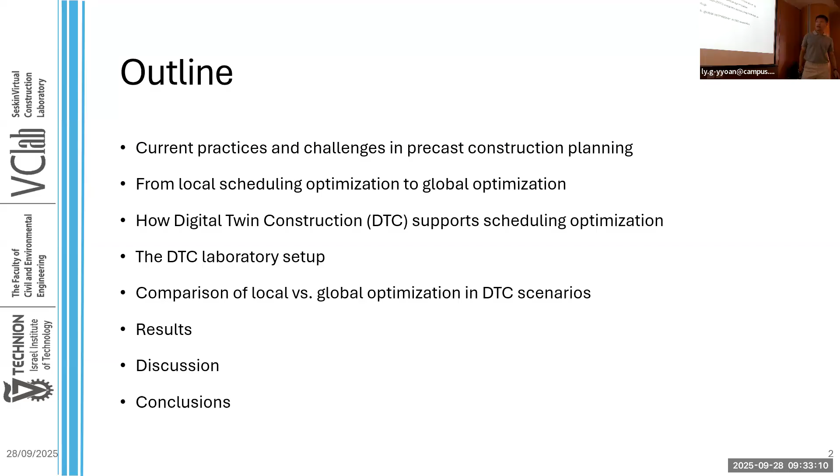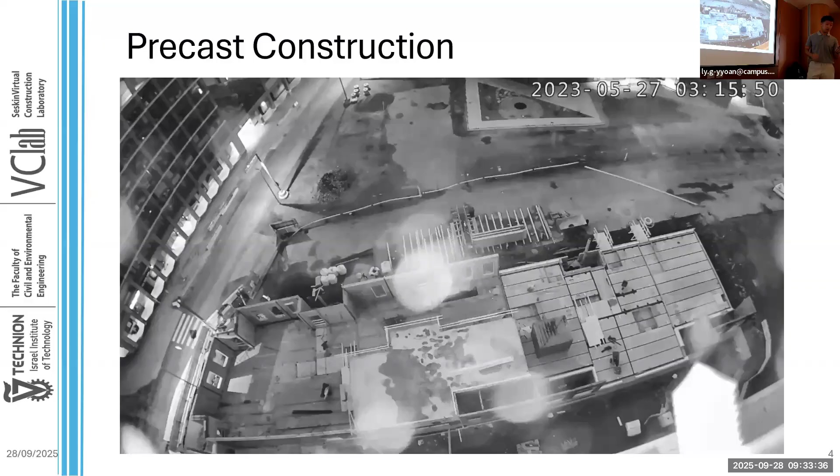Its global share is keep increasing, especially in North America and Europe, where the worker shortage is very crucial. But precast construction has its own problem: factory for production, on the road delivering, site erection - they are separated, and the planning are also isolated from each other.

This table is an interview summary with our project partner in the past. He shared with us that the precast design will freeze 6 weeks before delivery. Delivery slot negotiation will start 1 month ahead. Final slot confirmation usually 1 to 2 weeks before delivery. And the negotiation approach is mostly via phone call or email.

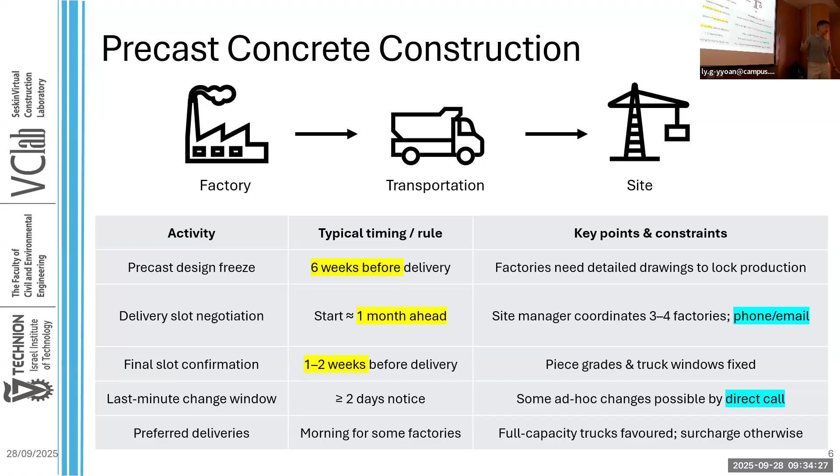So we can somehow conclude that in precast, there's lack of information sharing across stages, factory to site. Manual planning, and planning only focus on individual stages. At each operational space, factory doesn't like frequent mold changes, and site doesn't like delay. And they usually have conflicts.

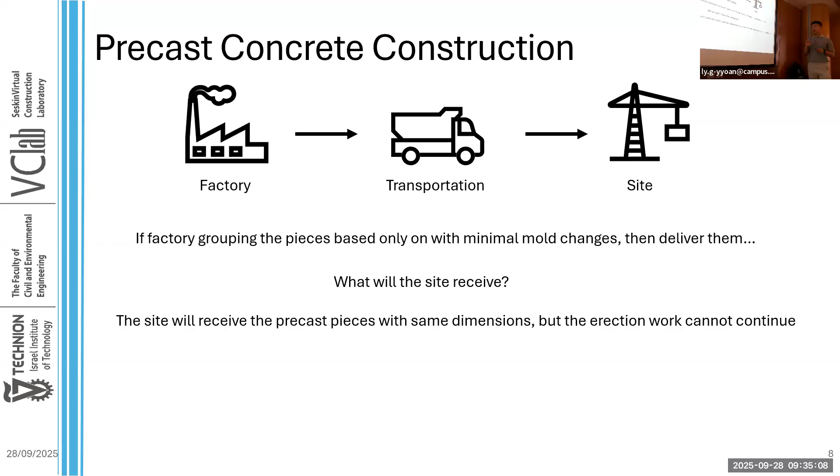For example, if factory groups the pieces only based on minimal mold changes, then delivers them to the site - what will the site receive? The site will receive the precast pieces with exactly the same dimensions, and erection work cannot be continued because no project can build the building this way.

So to address the issue, the current practice of factory planning uses this earliest due date rule. In the production line, they sequence the pieces - what is the first piece they're going to produce? The piece with the earliest due date.

In some very highly automated factories like Elematic, they have this manufacturing execution system, MES system. But this system is widely used in other industries like vehicle manufacturing and electronic manufacturing, but less adopted in construction. But companies like Elematic, yes, they have it.

The main purpose is to optimize the layout of casting beds, minimize strand waste - the strand is the pre-tensioning in the slab - and track the production progress consistent with design changes.

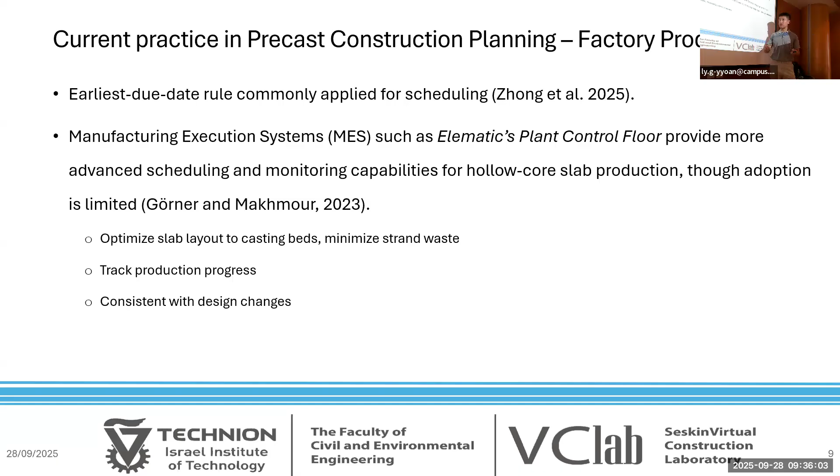In the literature, since Johnson's work in 1954, researchers have developed many topics in optimization of precast production. They formulate the problem in the topic of flow shop, resource allocation, mold grouping, and supply chain management, and they select mainly total make span or cost as their main target.

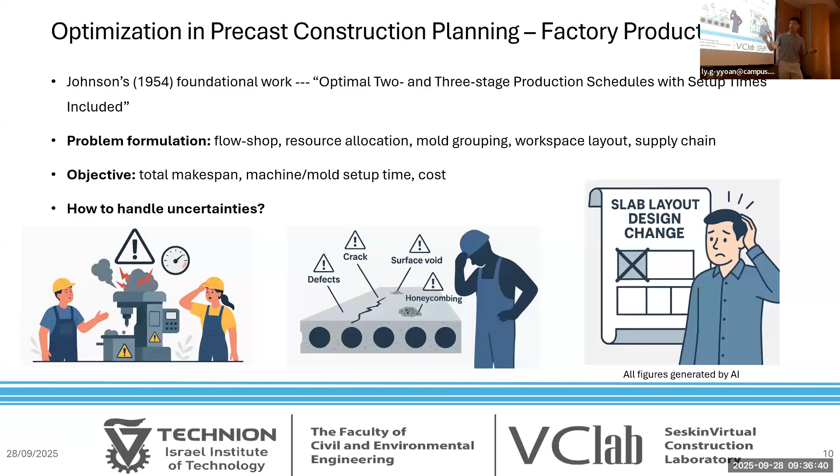But they fail to address how to deal with uncertainty. What if machine breakdown? What if defects? What if design change? What if due date change? So our study is about how we address this uncertainty issue. They develop a two-level rescheduling model for precast production, mainly against due date change. The structure is simple.

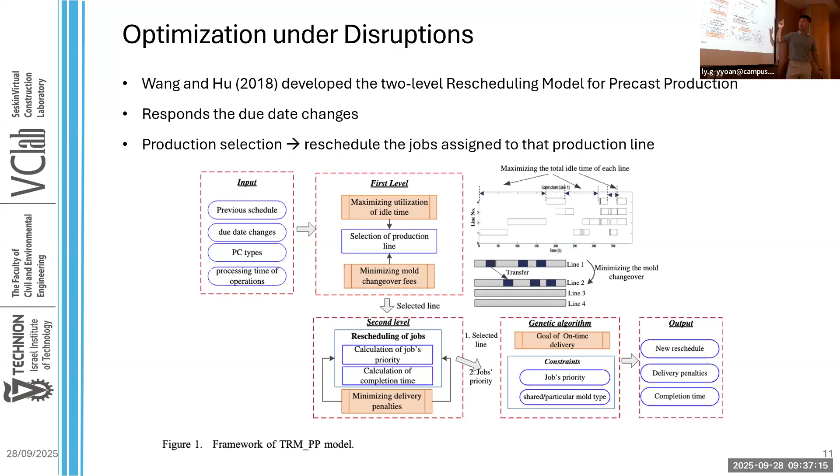First level, they will choose the proper production line to handle this external job. Second, regarding this selected production line, they reschedule all the pieces already assigned to the production line using GA by minimizing the delivery penalties.

Another study addresses the same issue, the due date change. Two steps: the first step is due date change and uncertainty generator. They evaluate this due date change uncertainty scenario by two parameters, due date change magnitude and due date receipt time. The magnitude means the due date changes 2 days early or 3 days after. The receipt time is what time the factory manager can notify this change.

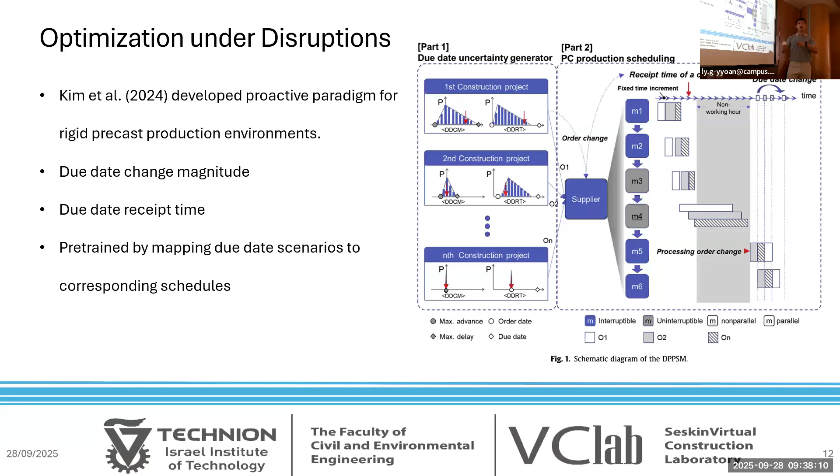Based on these two parameters, they generate many due date change cases and solve them one by one using GA. So essentially they pre-train all the scenarios, and if a real world due date change happens, they quickly match the closest one and apply it to the real world.

Now we move to the next stage: site planning, basically carried out into three main categories. First, traditional activity-based scheduling; second, lean method; and third, structure decomposition idea.

First, traditional method, activity-based scheduling, using Gantt chart, milestone, critical path method, based on fixed duration and dependencies. Lean methods like the last planner system only release ready, sound activities to the workers, and takt-time planning defines blocks of working time to enhance the delivery flow, the working flow of trades.

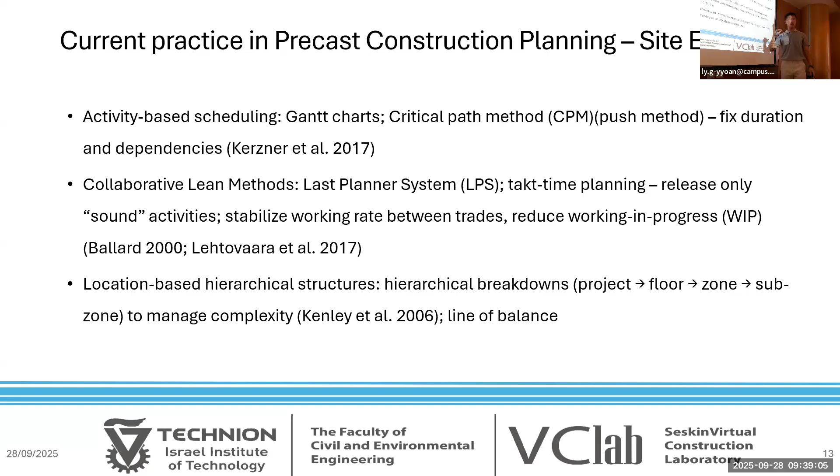Location-based hierarchical structures break down the whole building structure into floors, into zones, into subzones to manage the complexity. Another very interesting study for site erection.

This study developed a real-time synchronization system to handle disruption in precast assembly using digital twin. They have 3 layers: material arriving in the buffer, crane lifting the material, and workers doing assembly. They divide the time interval into small decision cycles, tau, typically 5 to 30 minutes.

At the end of each tau, they collect new information, update it to the digital twin, and check if all the material is ready, if the crane is ready, if all the people are prepared. If everything's satisfied, they continue and perform the work decided in the last decision cycle. If not, they make a new decision.

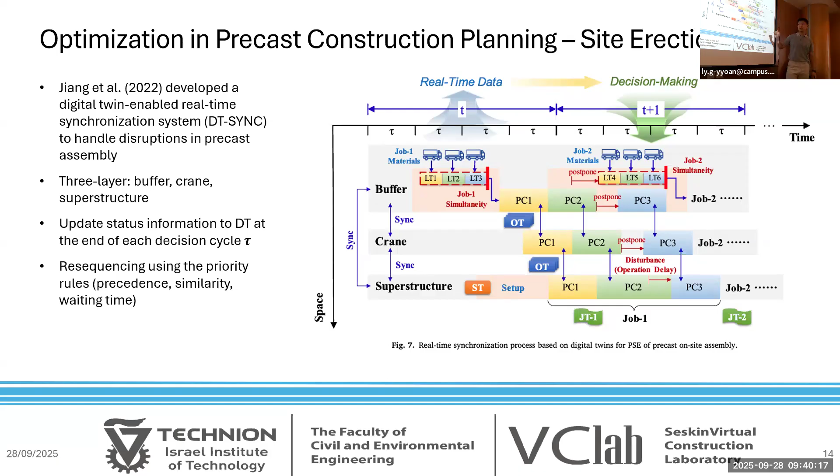This decision is based on simple priority rules: precedence of the job, similarity of the job, waiting time of the job. There's no real optimization algorithm behind this system because they need to make quick decisions.

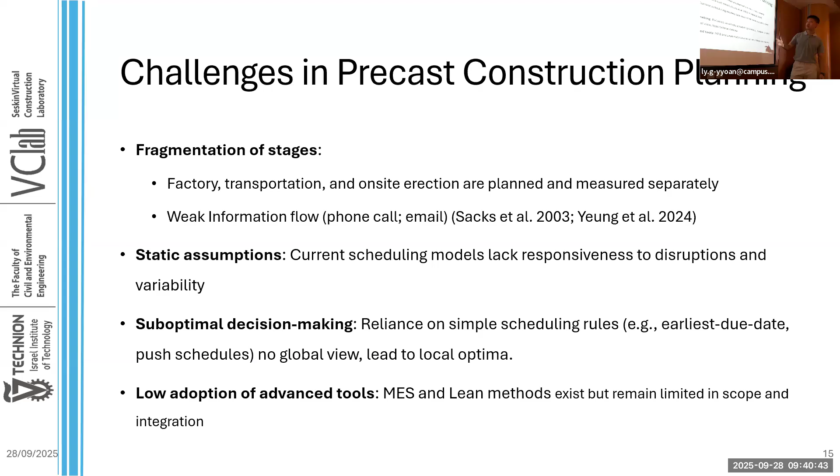To summarize the challenges in precast planning: fragmentation of stages, since the factory, transportation, and site erection are separated; weak information flow, since information does flow but through phone calls and emails, not a good flow; static assumptions and suboptimal decision-making; and less adoption of advanced tools.

So to address those issues, what do we need? We need to enhance information sharing with short-term feedback to improve the information flow, global optimization for global solution searching, and capability to handle uncertainty disruptions. And we need technology as a container to integrate everything.

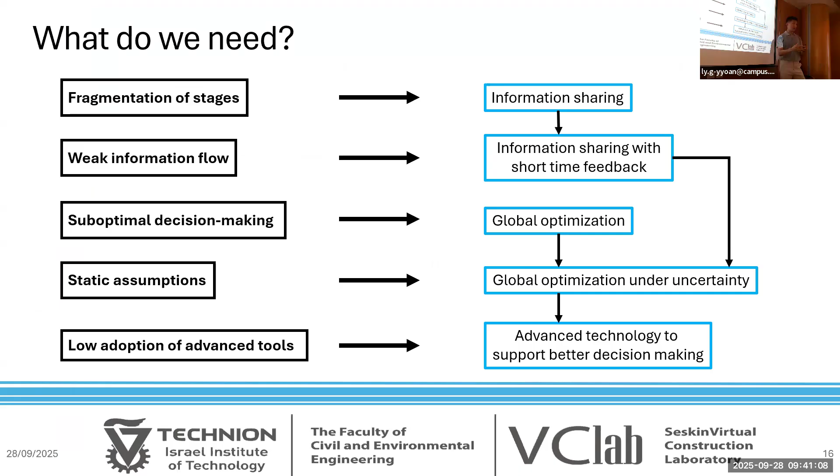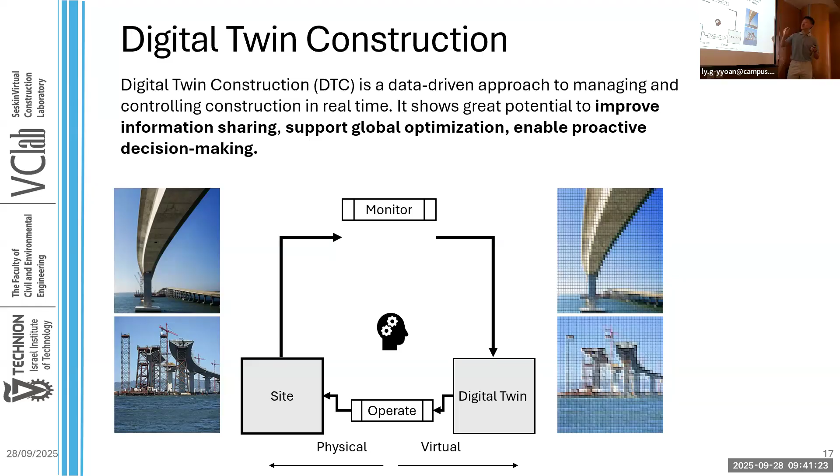So now I'm going to introduce digital twin construction, a data-driven approach to managing and controlling projects in real time. It shows great potential to manage situation awareness, support global optimization, and enable proactive decision-making.

The definition of digital twin has 3 levels. They don't all belong to the same category. A static model doesn't change, it's static, like a BIM model. A digital shadow is one-way dynamic; the virtual model will update when there's any physical changes.

And a digital twin is two-way dynamic, it's interactive. The virtual model will update when there are physical changes, and it can also analyze the surroundings and make new recommendation decisions for the real world.

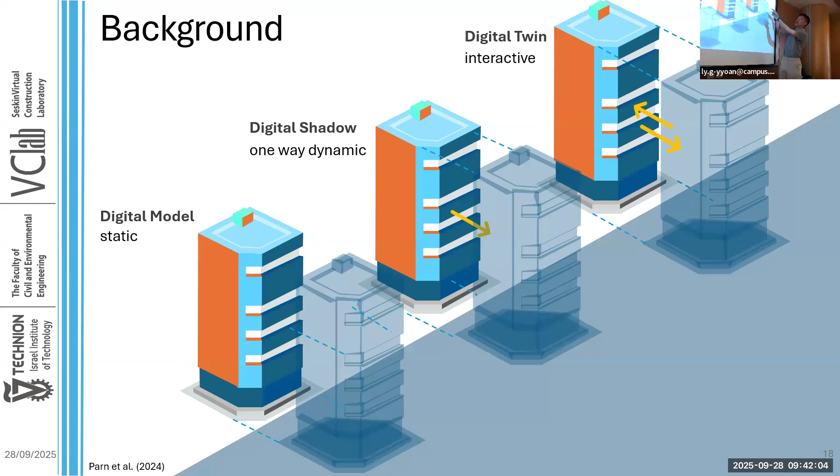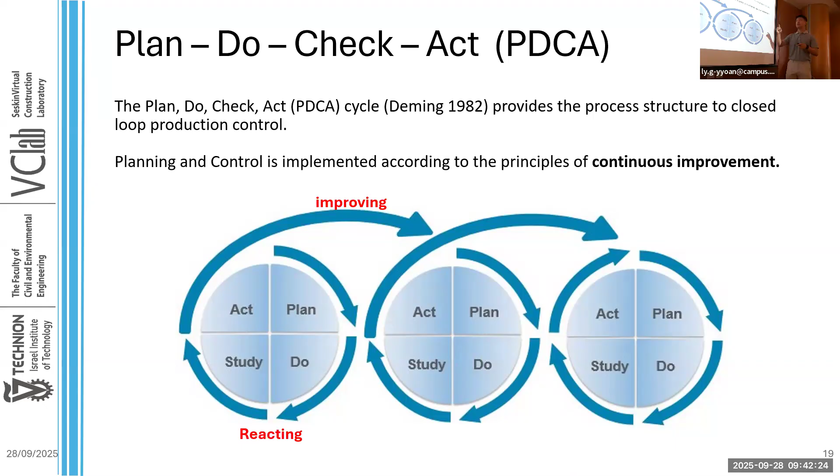So we combine digital twin with the PDCA cycle, and we arrive at DTC. I'll show this picture larger. So the key part of digital twin construction is this.

We interpret the data from the construction site, and we update the status model. What is a status model? The status model contains the current status of our building, of the worker, maybe of the whole construction site layout.

Then we compare it with our design model, what we want to achieve in the end, usually a BIM model. And then we make a new decision: we check the conformance, we predict the performance, and we make new decisions.

This decision acts as guidance to the site, forming a plan-check continuous improvement loop. On the left-hand side, we continuously store the project data together with historical data from other projects, and we may use machine learning algorithms to study the patterns and improve future performance.

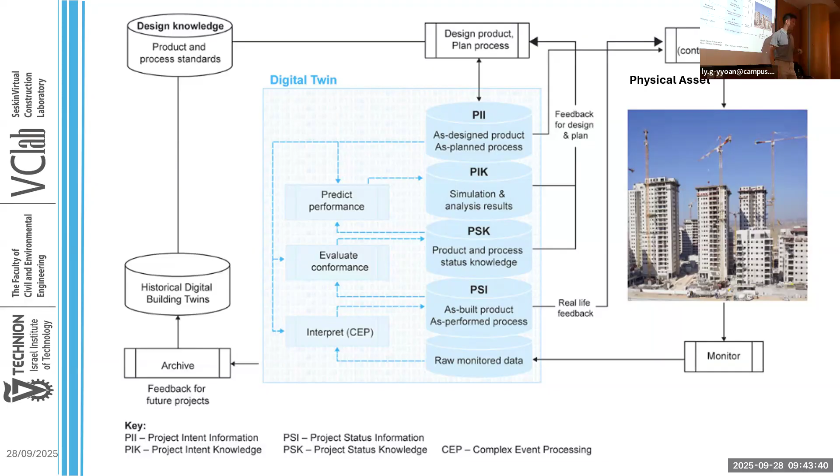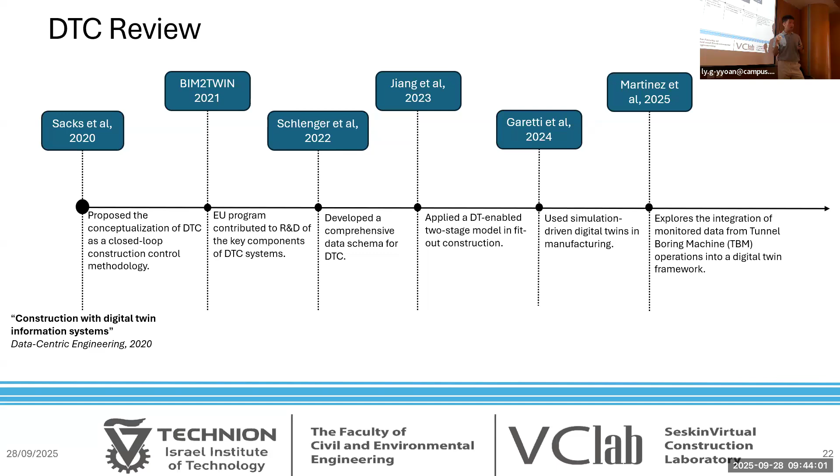The concept of DTC was first proposed in 2020, and since then research has developed key components of DTC, like data schemas, monitoring systems, and digital twin enabled two-stage models in fit-out construction. Surprisingly, we have some studies that really implement DTC into real projects.

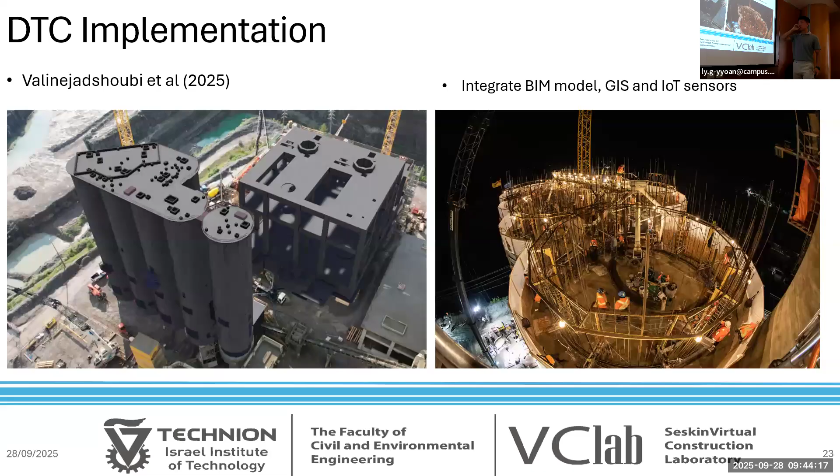This one is from a project in Canada. The main task of this project is building cement concrete silos, and they integrate BIM model, GIS, and IoT sensors. This is the brain structure behind the system.

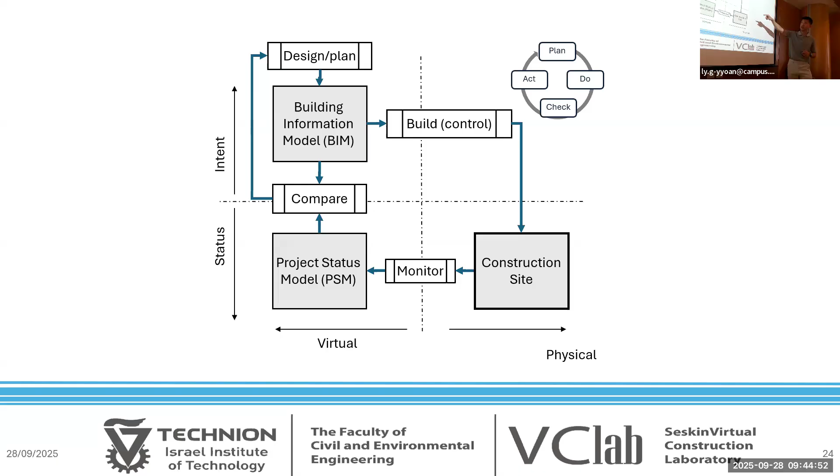So let's quickly define where the PDCA cycle is. They have the plan, represented by the BIM model, and the BIM model guides the site to do the job. From the monitoring, they interpret the data and create a status model. They compare the building information model and status model, and make new decisions. And this is the cycle.

So the potential of DTC: it already demonstrates strong capability to integrate planning and control across fragmented workflows, and some studies show DTC's benefits in enhancing project management. In current optimization, people address isolated stages and lack timely feedback for reaction.

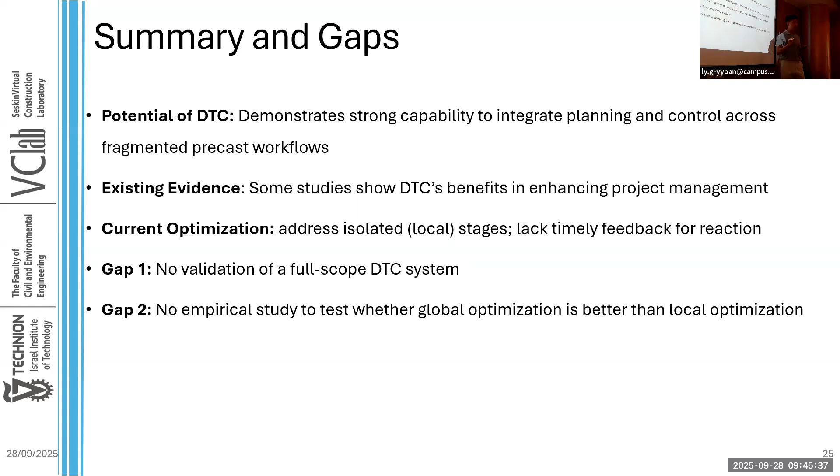Gap number 1: no validation of a full scope DTC system. The study I just showed you only focuses on the specific job on site, so it's not a full scope implementation of DTC. Another gap: no empirical study to test whether global optimization is better than local optimization.

So to address the issue, our research aim is: can global optimization supported by DTC have better performance than local optimization in terms of reducing the overall waste?

This study is part of a broader Ministry of Science of Israel funded research project titled Digital Twin Construction: Feasibility of an Ultimate Closed Loop Planning Cycle, which aimed to evaluate the overall feasibility of implementing the digital twin construction system. So my research question, first layer: is it feasible to implement global optimization of precast construction within a fully automated DTC PDCA loop?

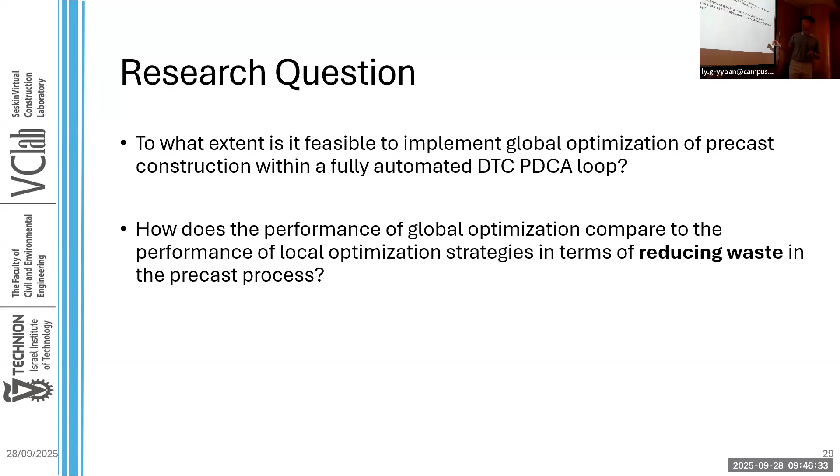And what is the performance comparison between global optimization strategy and local optimization strategy in terms of reducing waste in the precast process?

So our target is reducing the waste in the precast workflow. How do we define the waste?

In Lean, we call waste non-value adding time. Basically, if there is a wall in the full life cycle of the precast workflow, we produce the wall, wait in the factory inventory for delivery, deliver on the road, wait in the site inventory for erection, and then erect. At these 5 operational stages, we have several wastes: mold changing for production, waiting time waste, inventory holding waiting time waste, on-site inventory holding waiting time waste, and transportation waste.

For transportation, we define it like this: if a truck per trip can carry 10 pieces but we only carry 5, the other 5 empty spaces we define as waste. And apartment delay is also a waste. I will specify this definition in detail in the next slide.

So our overall objective function is defined as minimizing the total waste in this precast workflow. Apartment delay cost is defined as the penalty occurring when the completion of an apartment exceeds the planned schedule. If you go into the literature, and also how people manage it on site, they focus on the total duration of the project. In literature, we call this total makespan.

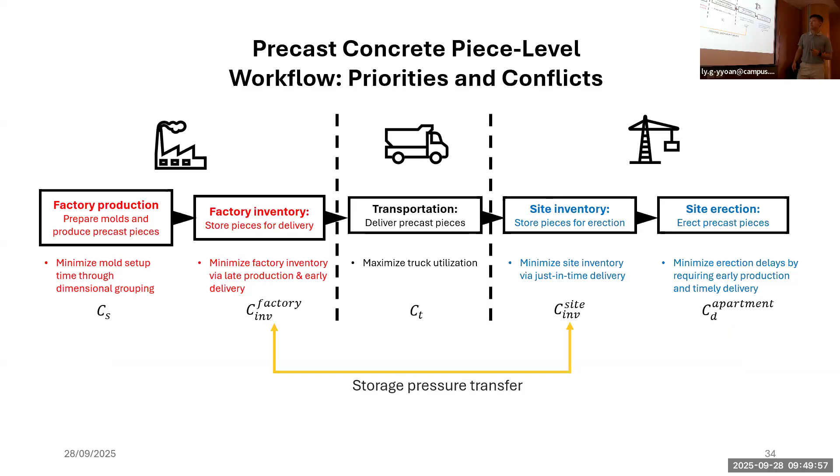If we identify 5 different ways across the total flow, and if we only optimize locally, it may reduce the local operational stage flow, but we have more chances to increase waste in other stages. For example, there are always conflicts like grouping method, storage pressure, transfer between storage, and dispatching rule. So these 5 operational stages have their own conflicts. That is our motivation for using global optimization to optimize the overall workflow, to make all operational stages achieve a higher level goal.

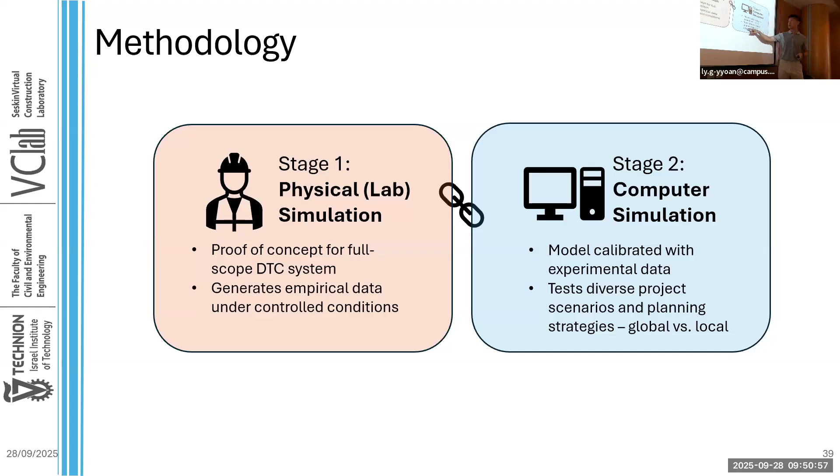So to test our methodology and experiment design, in this research we adopt a hybrid methodology combining physical and computer simulation. The purpose of physical simulation is proof of concept for a full scope DTC system, generating empirical data under controlled conditions. For stage number 2, computer simulation, the model is calibrated with experimental data from stage number 1, testing diverse project scenarios and planning strategies. The planning strategies refer to global and local.

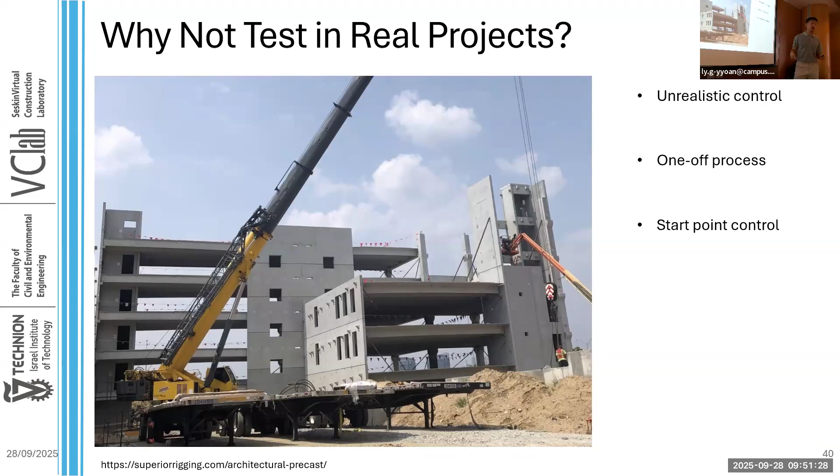You may wonder, why don't we test this in a real project to compare our strategies? The reason is, first, we couldn't find a company that owns the full life cycle of a precast project. And also, construction is a one-off process. Each building is one of a kind. We couldn't rerun the project multiple times or control the starting points to compare our strategies.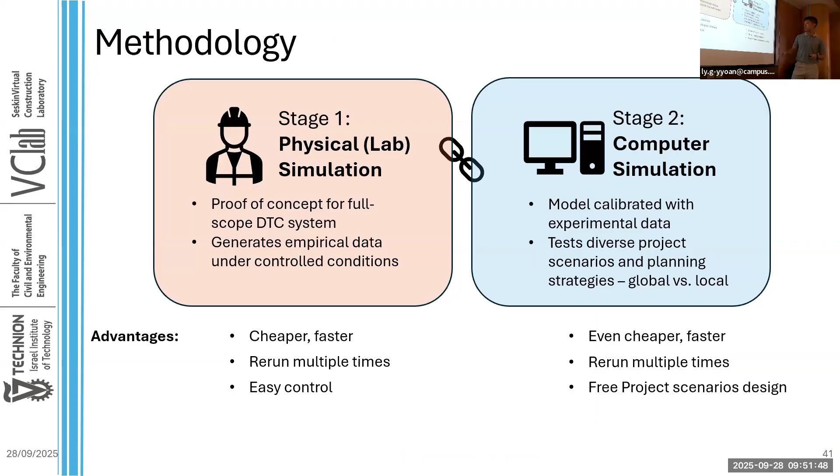So actually we have advantages with simulation. Both physical and computer simulation are cheaper and faster. We can rerun multiple times and control the starting points. Specifically for stage number 1, in the laboratory setup, it's easier to control the negotiation between machines. And for stage number 2, we can design project scenarios freely.

The methods: stage number 1 is physical simulation, 5 runs for each scenario, local and global. The building size is 2 floors, and each experiment lasts 4 hours with 4 workers at a time. The reason we don't run the full 8-floor project in physical simulation is that 2 floors already took us 4 hours, so we couldn't imagine how long 8 floors would take. For computer simulation, we run multiple times to test diverse scenarios across 8 floors, and the simulation time mainly depends on how many plans we choose at the beginning, which I'll explain later.

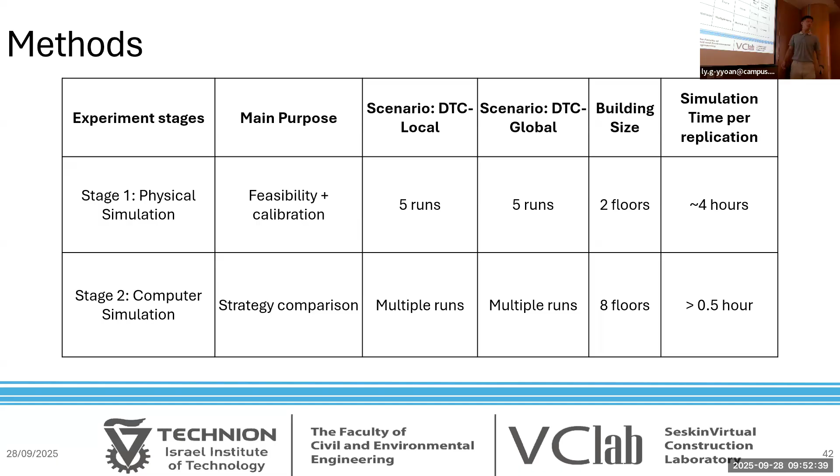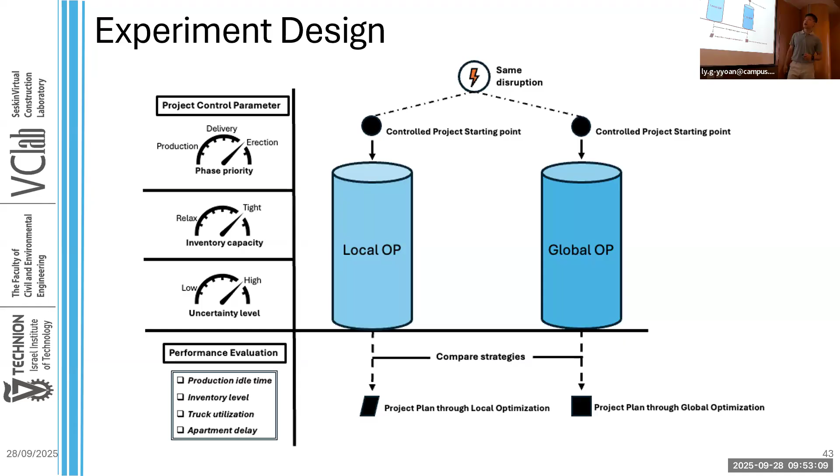A project scenario example: imagine a precast residential project planned for completion in 8 months, requiring delivery of 6 apartments per month. This project is highly reliant on a very busy factory, and the factory can only allocate 2 production lines to us. To meet the project schedule, the factory is allowed to start production earlier, but no earlier than 2 months before erection begins. The site inventory is very constrained, only 15 pieces. We can start with only 15 precast pieces.

Given that project scenario, we control our parameters. The key parameter control: target apartment delivery rate is 6 apartments per month, and we use this target rate to calculate our apartment delay. Number of production lines: only 2. Earliest production starting day: minus 60, or 2 months. And site inventory limit: 15.

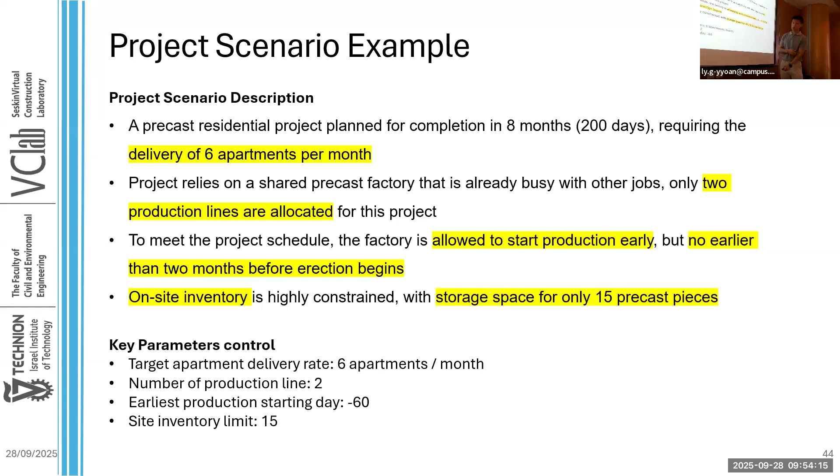Experimental scenario: how the DTC structure fits into our research. Again, we found the loop, so let's start from the bottom. Production, delivery, erection, doing the job. We use a monitoring system and scanner to capture status information through the digital twin. We update the information and feed it into the optimizer. The optimizer makes new decisions: production plan, delivery plan, erection plan. We convert it to digital representation and give the next cycle of do.

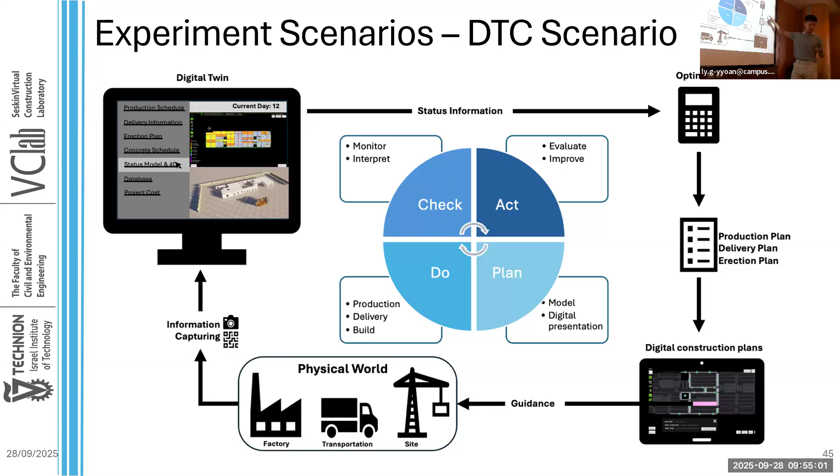Now we will focus on this optimizer. I'll explain the difference between local and global optimization.

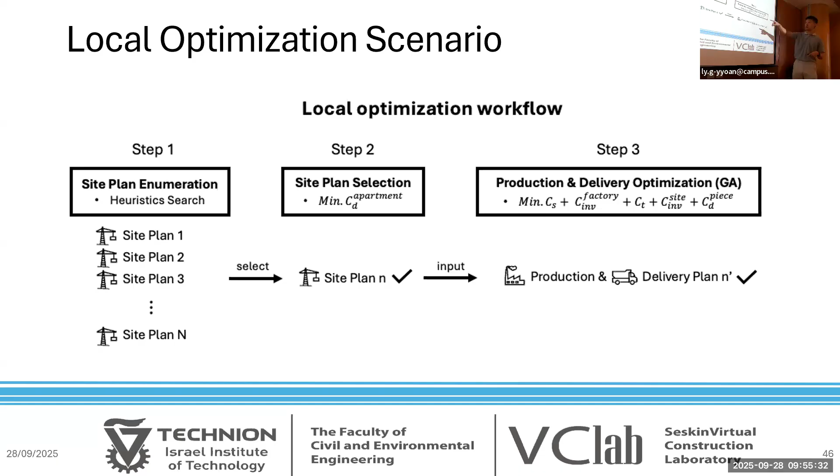Local optimization workflow has 3 steps. The first step is site plan enumeration. Then we choose the best plan N by minimum apartment delay. This site plan N becomes my input, which we feed into the production delivery optimizer. We receive the production delivery plan, primed according to this local objective.

Global optimization workflow: step number 1 is the same, site plan enumeration. But instead of choosing right after, we feed all the candidate site plans to the factory optimizer. Before step number 3, we receive an integrated site candidates list, and we evaluate its uncertainty. In the final step, we choose the best integrated plan based on the global objective as well as the score from the uncertainty assessment.

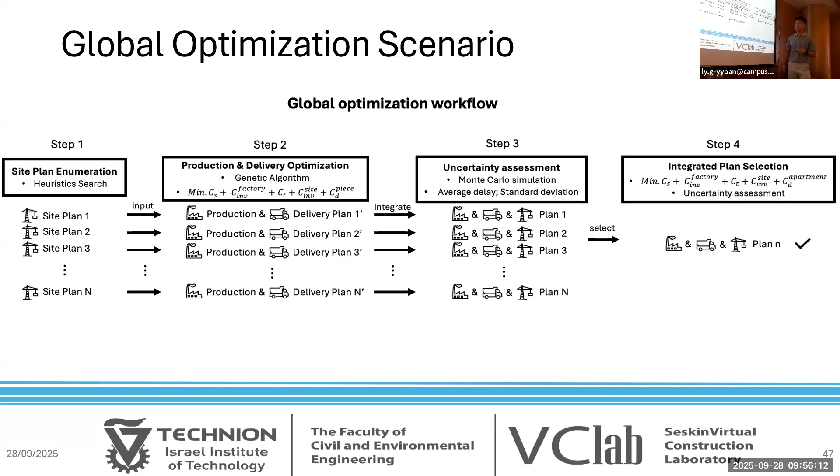So despite the structural differences, the main difference is the objective of local and global. I already explained the definition of apartment delay, but in the local scenario, we're using the piece delay. What is the difference between piece delay and apartment delay?

Here's another example. I have an apartment, and this wall is delayed. According to the local scenario, factory and site contract, a delay in one precast wall only incurs a penalty for that single piece. That is the local scenario. In the global scenario at project level, a delay in one precast wall prevents the entire apartment from being completed, delaying the entire apartment and slab. Without that wall, I cannot install all the slab pieces. So that's the main difference between local and global.

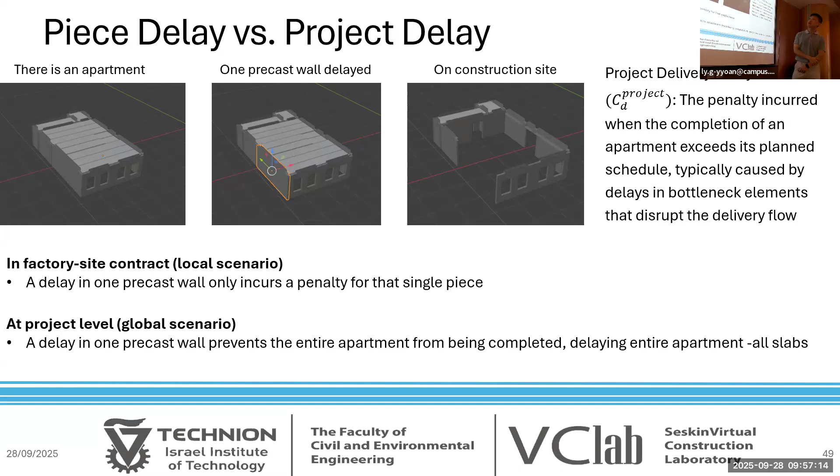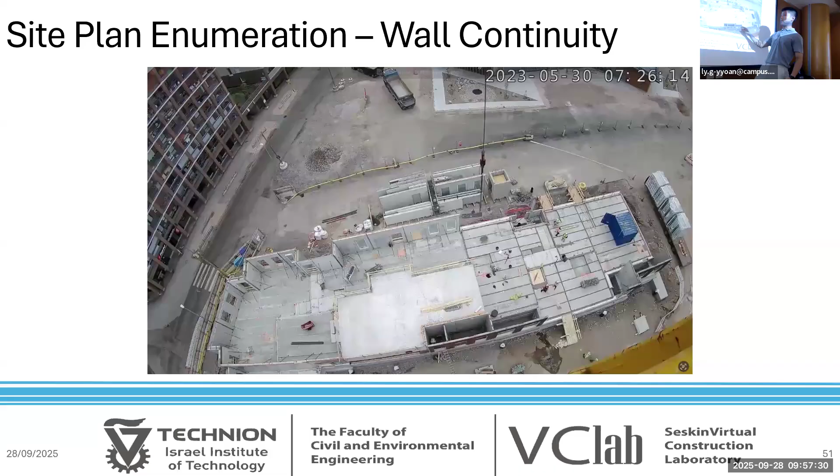Site plan enumeration - so now I'm going to explain step number 1. This is a picture from the precast project. As you can see, at the very beginning of the project, they start erecting the walls in the outer layer due to the rules of wall continuity. Another picture you can see here and here. They finish this apartment first, and then they switch to other zones. Another one, more obvious: they finish this block first, and then they switch to another block.

So until now, we have seen this project adopt a mixed site plan strategy of wall continuity by blocks, by floors, by zone apartment. So basically they're using the idea of location-based structure. So in our graphic site plan enumeration, we're using the same heuristics, a mixed heuristic.

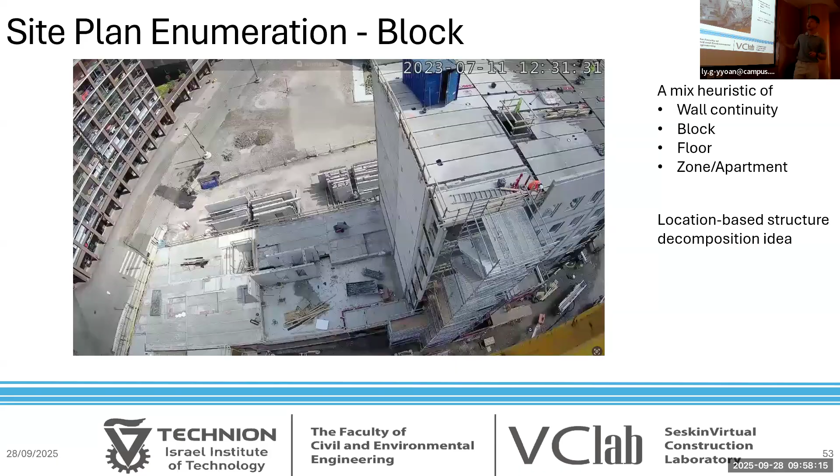Our mathematical model is subject to 5 constraints. First, each wall can only be assigned to one table. Precedence and time continuity for production - that's how the sequence works in the same production line. Only after the previous wall finishes production can the next wall start. Delivery after production finishes, obviously, and we cannot exceed both inventory limits.

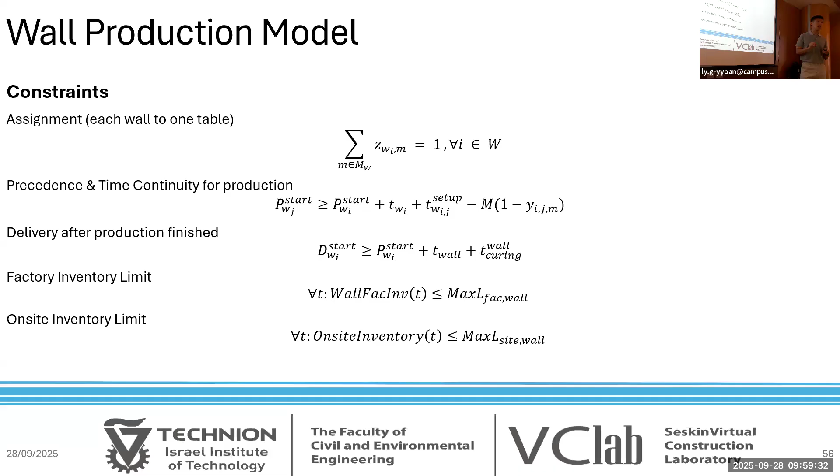Since our problem belongs to the classic combinatorial problem class, we can formulate it as an integer linear programming model. This model is NP-hard - we cannot find the exact solution using a solver in feasible computational time. Most of you can see if you go into the literature, most people are using GA, the most popular algorithm to solve this kind of problem. We also use GA as our main solver.

Then it goes to fitness calculation - calculate the current solution quality, just calculate this objective function. Then we go to the genetic operator, and after each genetic action, we have a repairing mechanism. This repairing mechanism ensures all my child solutions are feasible, so we can use this solution for the next working step.

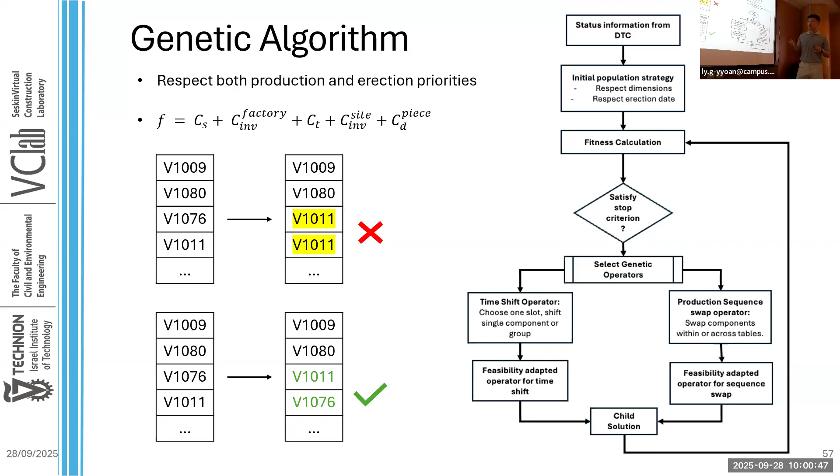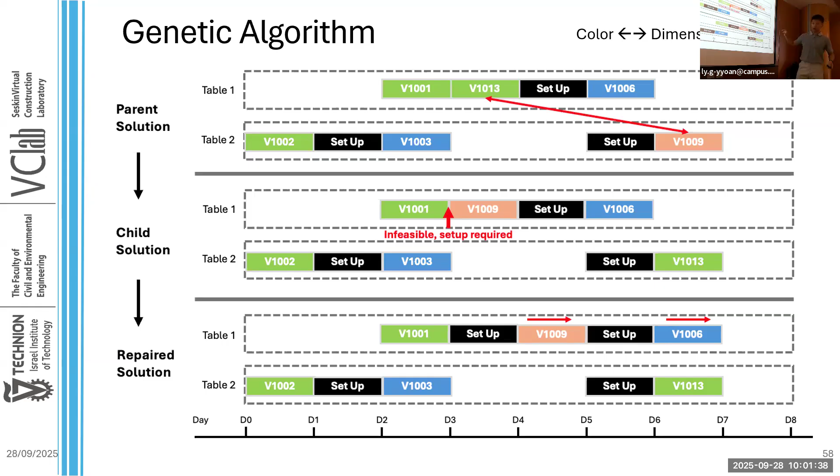Validation of optimization tools. So we designed 7 scenarios. Those 7 scenarios are not very extreme, but we can predict the expectation of the output behaviors.

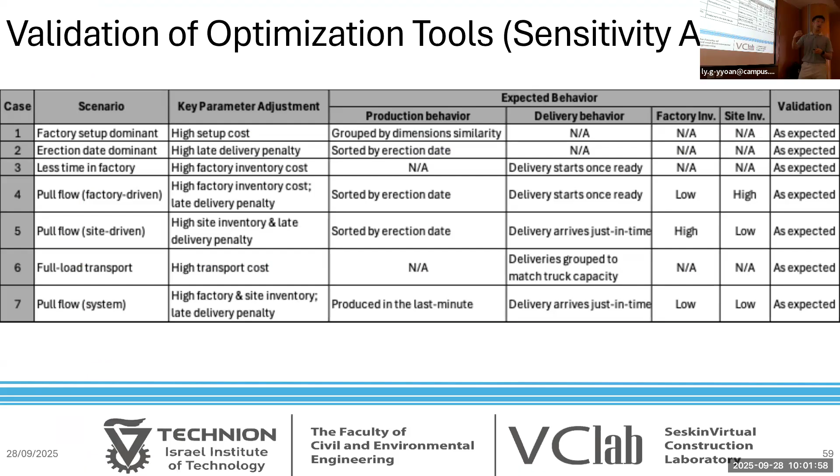Let's have an example, scenario number 4, pull flow. So I set very high cost for factory inventory and delivery penalty. I don't recommend storing in the factory inventory, and I don't recommend any delays. So the expected behavior of delivery is that all deliveries will start once ready, because no walls want to stay in

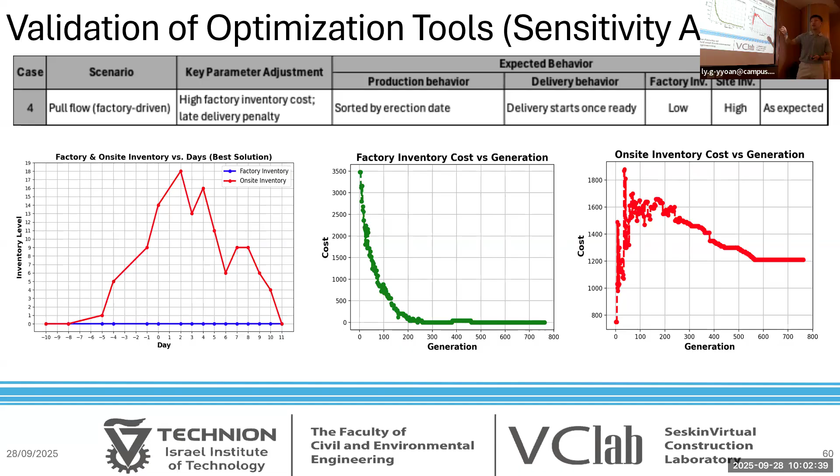the factory inventory. We plug all the parameters into the GA, and then we receive the output. Factory inventory remains at a very low level, always 0, which means all pieces are delivered once ready. This is a partial solution. As we can see, after production finishes and 1 day curing, all the delivery starts, all of them.

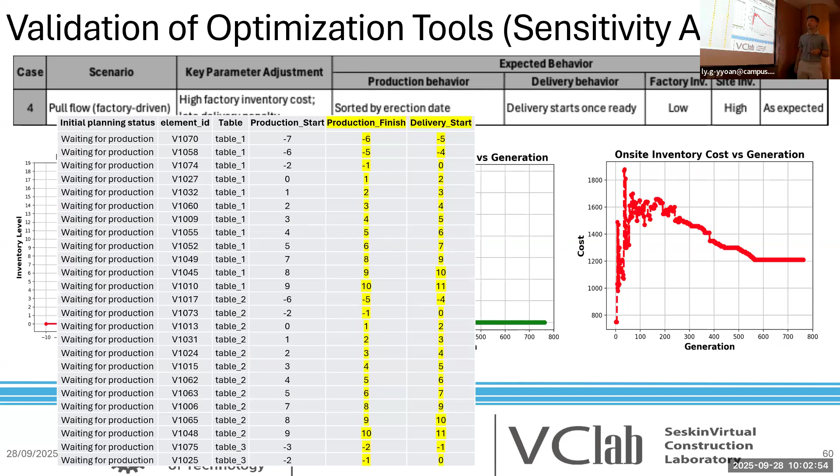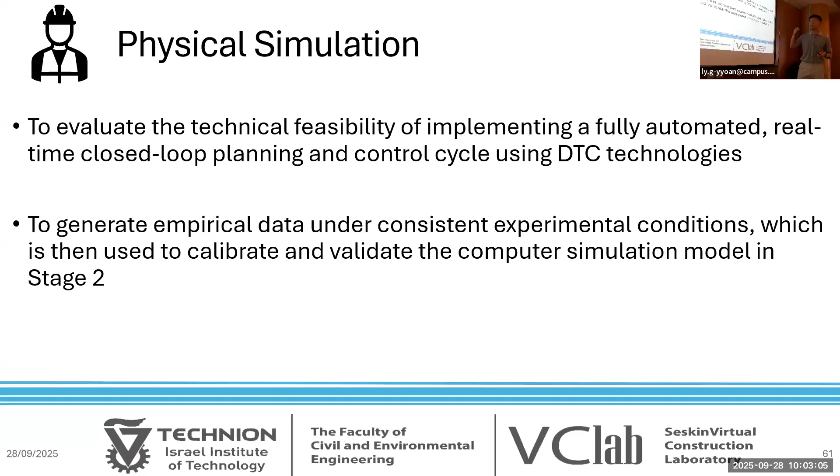And we have 6 more scenarios. So physical simulation, first evaluate the feasibility. Second, generate empirical data under consistent experimental conditions to validate and calibrate the computer simulation.

Physical experiments setup overview. In the lab, we built a 1:25 scale physical model of a building. We have workers and a foreman, and the monitoring system and scanners keep capturing data from the construction site, updating the SQL database where we store the status model. We compare it together with the BIM model, feed the information into the optimizer, make new decisions for the next doing cycle, and do check.

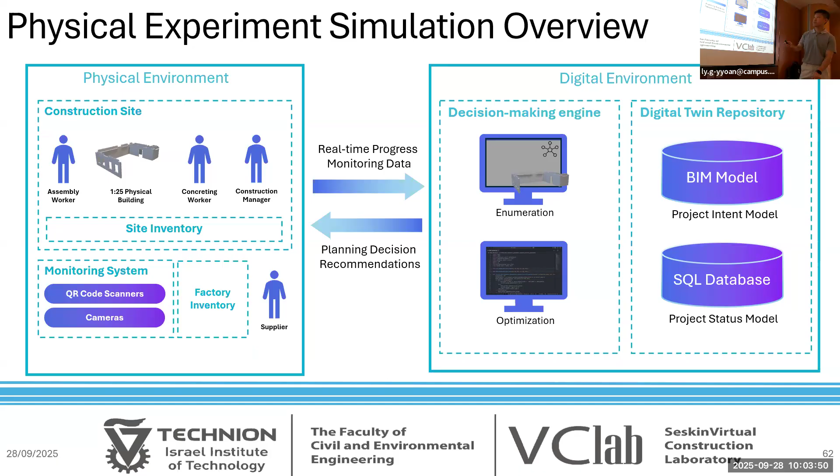Physical environment layout: inventory and our construction workers. This is the construction site floor plan, monitoring system with 4 cameras, and this is the real-time detection model from the monitoring system.

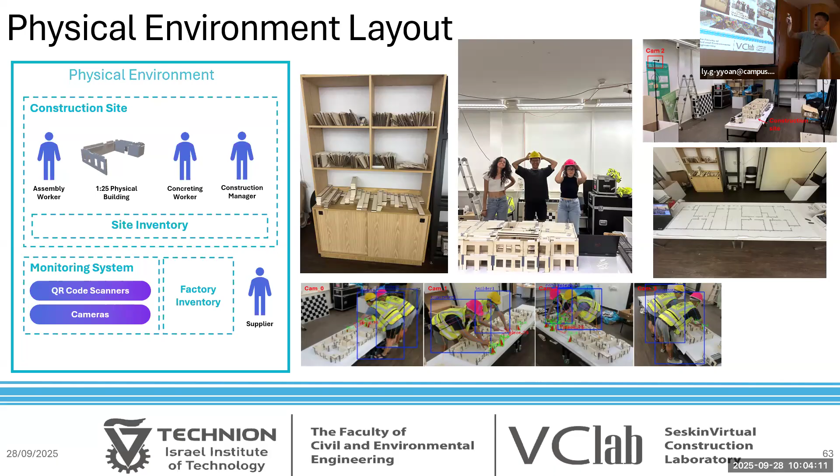This scaled building's real dimension is 2.3 meters long, 0.6 width, and this height, of residential buildings constructed in Helsinki, Finland, with over 300 precast pieces, laser cut wood, nearly 300. We simulate the concrete, cast-in-place concrete, using 3D printed plastic.

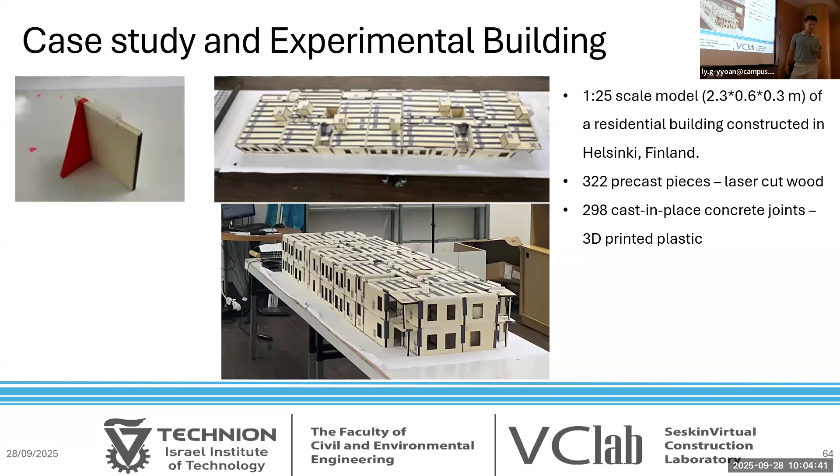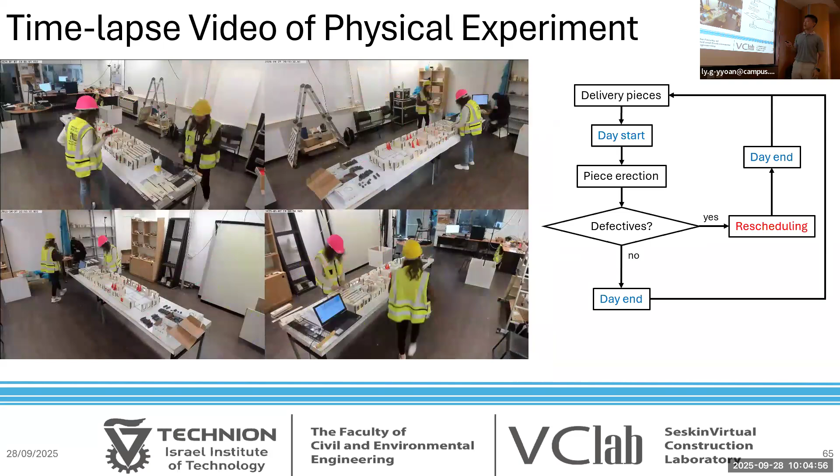This is a time-lapse video while we were working. The logic is simple: we deliver the pieces before the day starts, and workers start the piece erection job. If we find any defects, we rerun the optimizer, then continue to the next phase. If there are no defects, work continues until day end.

And the computer simulation logic is exactly the same as our physical experiment. The only difference is that in the physical experiment, people erect the pieces, but in computer simulation, the computer helps us simulate the process of piece erection.

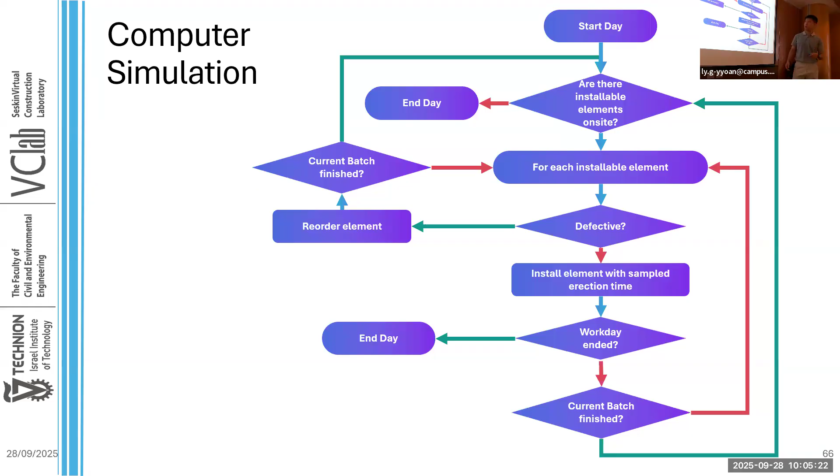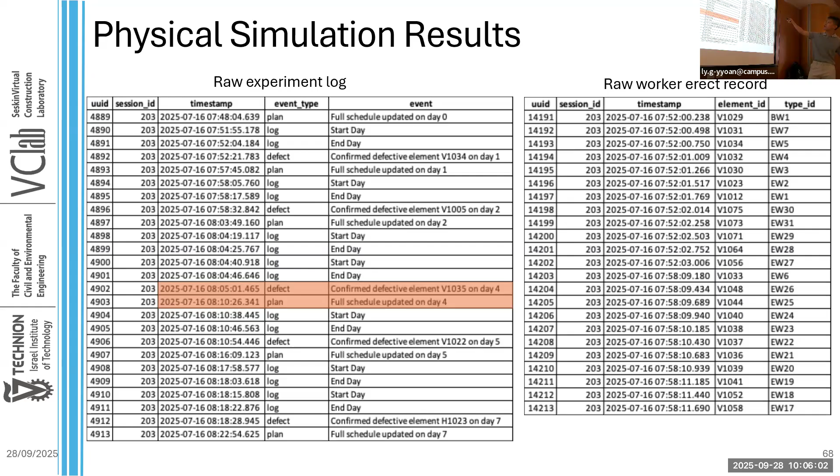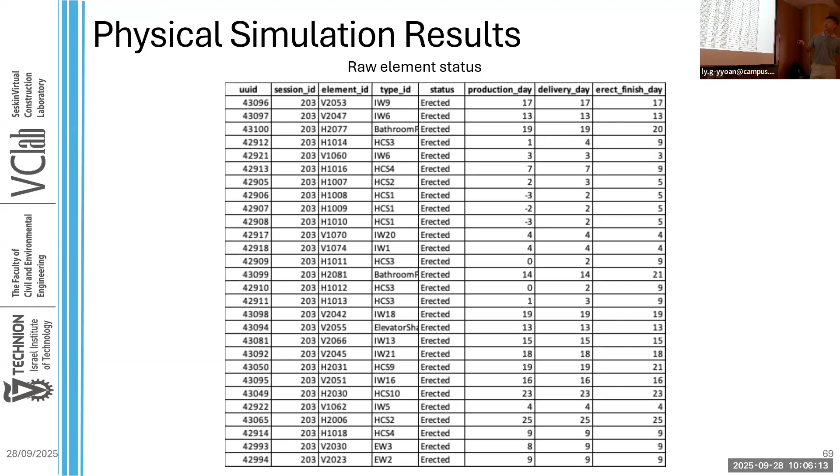Under the table, we recorded the timestamps for each erection finish time of each piece. The raw element status table summarizes for each precast piece what is the production starting time, the delivery starting time, and the erection finish time. Since we have different types of precast elements - bathroom pods, walls, hollow slabs, stairs, elevator shafts - each has a different time distribution of erection. Now we use this information to calibrate the computer simulation.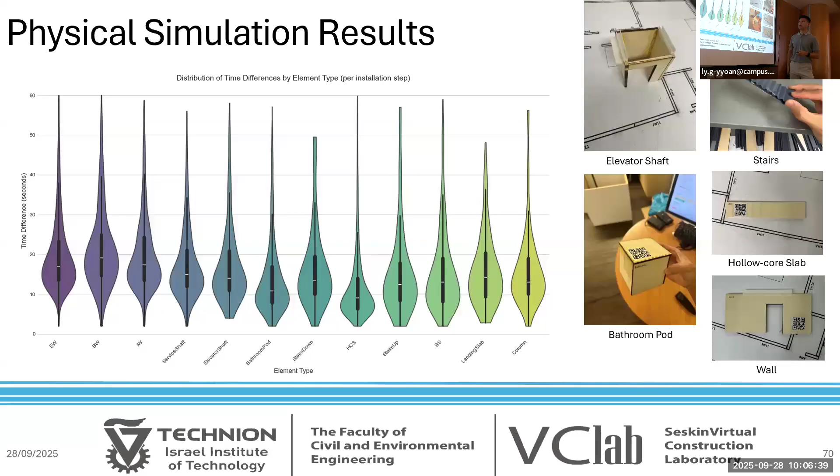So to answer the risk question we raised at the beginning - to what extent is it feasible to implement global optimization of precast construction within a fully automated DTC control cycle - there is a prerequisite question embedded inside: is a fully automated DTC cycle itself feasible? To answer this sub-question, we performed a set of experiments within the broader Ministry of Science research topic.

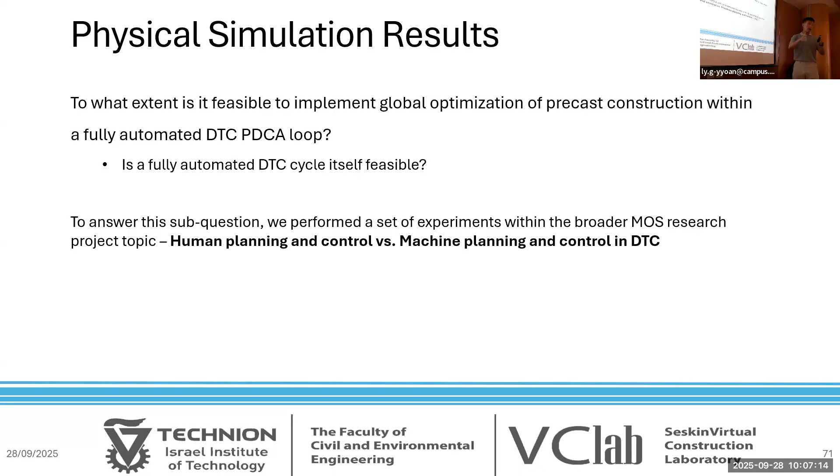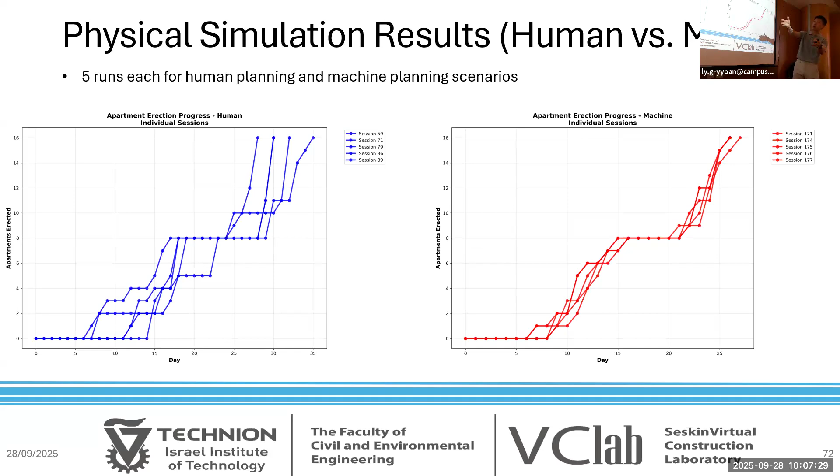The experiment is human planning and control versus machine planning and control using DTC. This is the output, this is the result from the experiment.

5 runs for each: 5 runs for human planning and 5 runs for machine planning. It's too small, so this is better. The y-axis is the cumulative apartment number erected, and this is time.

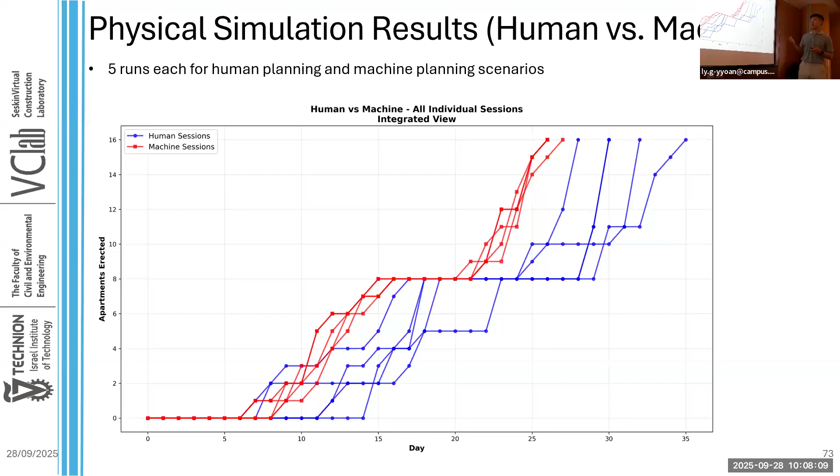We can see the right curve is machine planning, and we performed successfully 10 runs. So we can say that yes, it is feasible to run a fully automated DTC cycle without any human inspection. Surprisingly, machine planning actually has better performance and a more resilient plan than human planning - this is their standard deviation.

So now we can start to answer: now we can say that a fully automated DTC cycle is feasible. And now we can answer the question: is it feasible to implement global optimization of precast within a fully automated DTC?

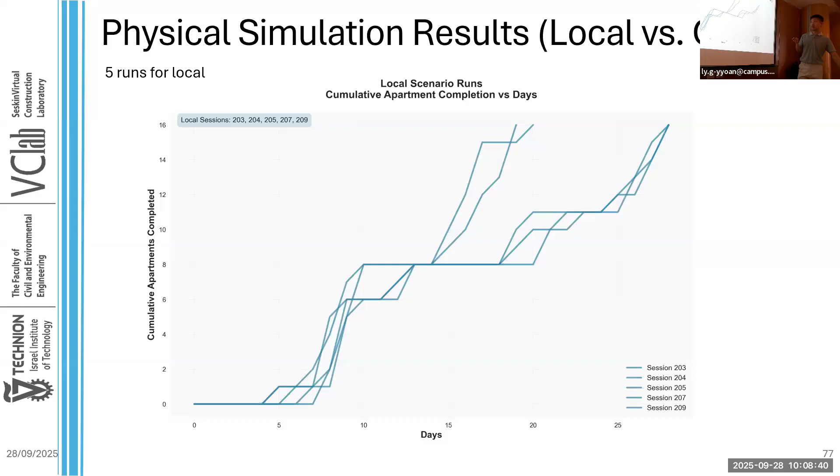The experiment: this is 5 runs for the local scenario using DTC, and we add in the global results.

And the thicker line is the average of global and local. So we compare the mean duration. We can say that global output is better than local, and both of them are running successfully. Standard deviation for local is 4.2, for global is 0.8, which indicates that our global plan is better and more

stable, more resilient than local to handle uncertainty. Delivery rate, total rate is total production, like total cycle time, apartment per day. For local is 0.67, for global is 0.86. And this filtered rate is this.

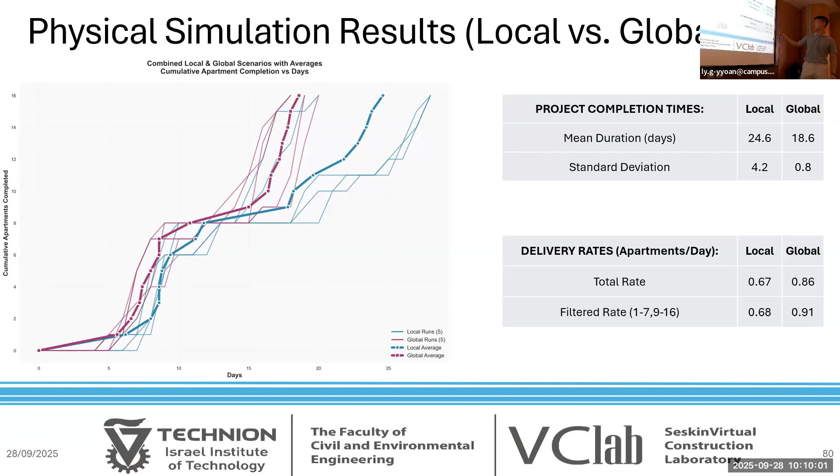Okay, so you may notice for both curves, they have two periods. One is this relative flat period, another is this steep period. The reason is that the flat period occurs when there's a transition between floors - this is from floor 0 to 1, this is from floor 1 to 2. So this filtered rate calculates what is the steep rate. We can see global is 0.9 and local is 0.68.

Discussion. First, limitations. Our simulation is only built on one project, so we can't say our findings transfer to other projects with different size and different country, let's say. And simulation limitation - we didn't physically model the factory and transportation in our experiment, so the logic may not be transparent in the experiment.

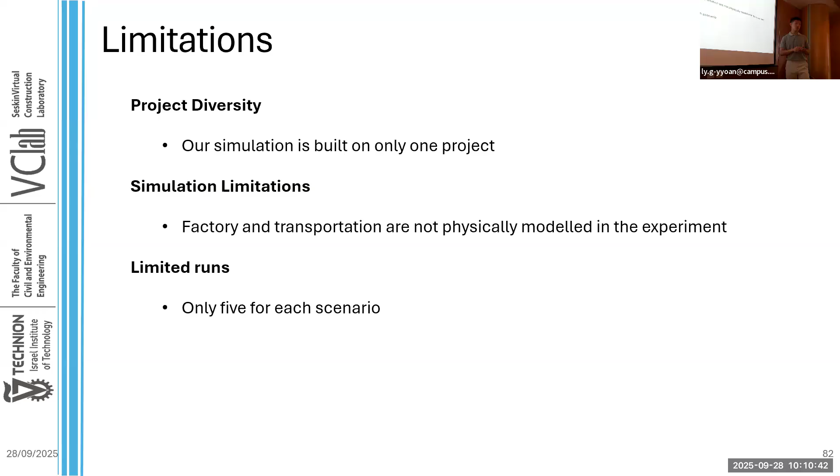And limited runs, only 5 for each scenario of physical runs. Our computer simulation is still ongoing, and today my discussion and contribution will only be based on what I have now.

Discussion about the feasibility of DTC. I split it into 3 layers. First, technical feasibility - through 2 sets of experiments, human and machine, global and local, we can answer yes. The technical feasibility of DTC, a fully automated DTC is feasible. A global optimization within the fully automated DTC is also feasible.

And industrial feasibility - what happens if we scale our setup up? My answer is yes. Technologies like cameras, monitoring systems, RFID are already in the factory, already in the industry - companies like Buildots and Versatile are already using AI and computer vision to detect building progress. And in terms of the resolution of the camera, lab requirements are much higher than the real world.

So we can say industrial feasibility is also proved, but the technology shift needs testing in the real world to calibrate. Commercial feasibility, like in the contract aspect, is feasible under the same company and joint cost center for site and factory. So if all the stakeholders - production, transportation, third-party transportation, and the data - belong to the same company, they already share the same goal, so we don't need to worry about that. But if they belong to different companies, they are not a joint cost center, so a collaborative contract within shared objectives, shared risks, and shared rewards should be addressed beforehand.

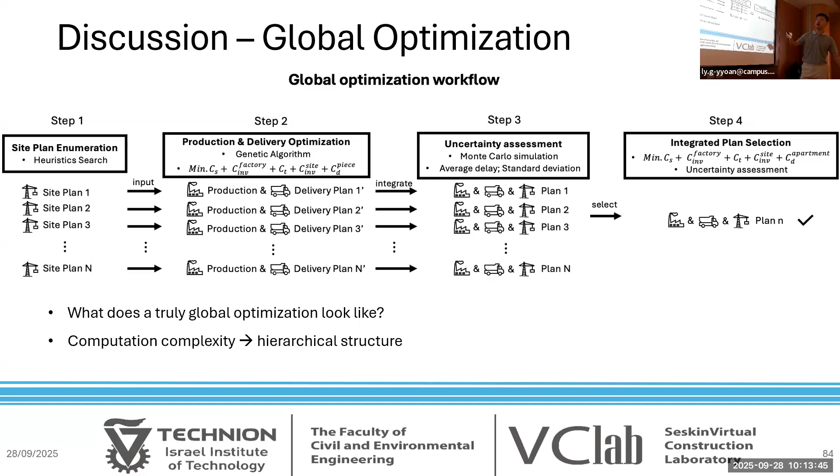So conclusions. A fully automated DTC is feasible. Implementation of technologies needs testing - we just need to calibrate in the field - and a collaborative contract needs to be established beforehand. And DTC can support global optimization, and from our current result, global optimization delivers better and more stable outcomes.

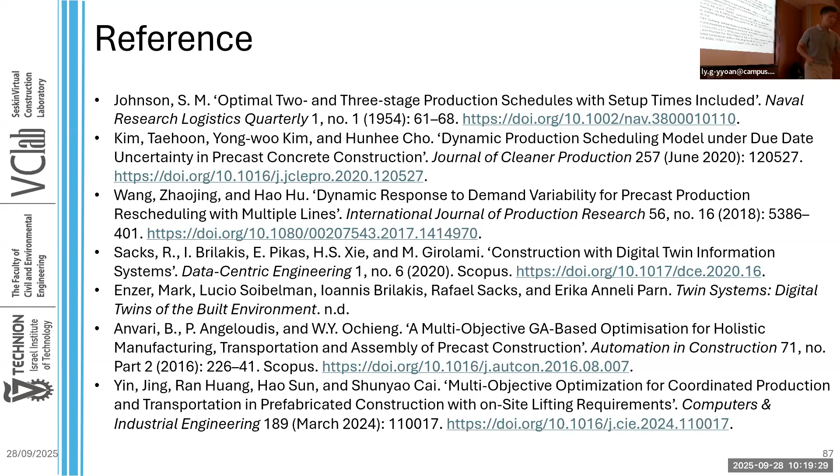I saw that in the part about optimization of cost, you didn't refer to capital cost. You referred to transportation cost, storage cost, and things like that. Can you explain shortly, first of all, how did you define storage cost? Not the verification cost, because that's obvious, but the storage cost. And second, why did you omit the capital cost?

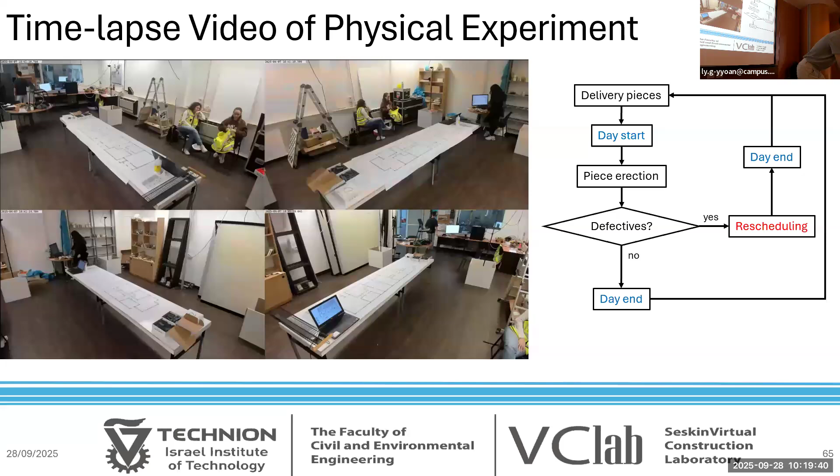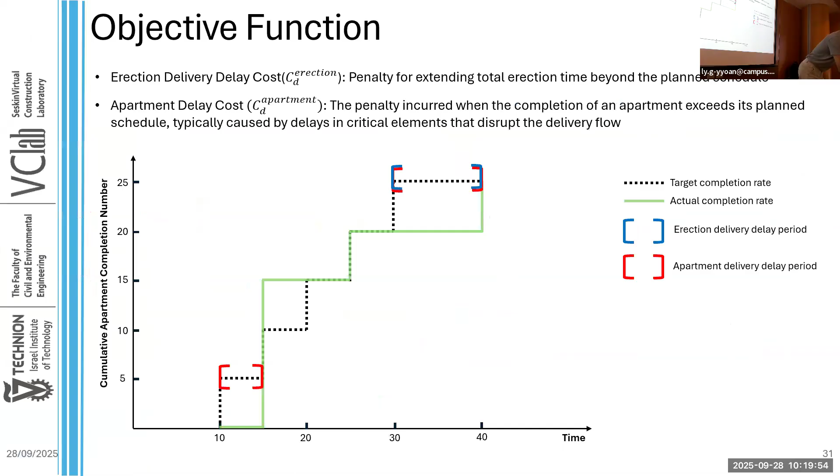Yes, okay, wait. Almost there. So I think you mainly ask two questions: where is the capital cost, where is the material cost, where is the labor cost?

Right? When you manufacture early, you pay the capital cost early, and it takes time until you get payment. So my target is not to compute the cost, even though my objective representation is cost, because all of them are waste. We are trying to minimize the waste according to this precast flow. It's not that we use cost representation to compute cost; we transfer waste into cost, but we didn't consider that.

We didn't think about, okay, you asked about capital, if we're starting earlier, why we... So currently we don't have that, but in your case we can add this parameter and it won't affect the total structure. We can say if you start earlier you will pay overhead, you will pay a capital cost of early production. We can simply add it to our GA.

It won't affect the overall structure, and I'll explain more about this objective function. So this function is cost, but it's not actually related to project cost, labor cost, material cost. We just transfer the waste into a cost representation. This is the first question.